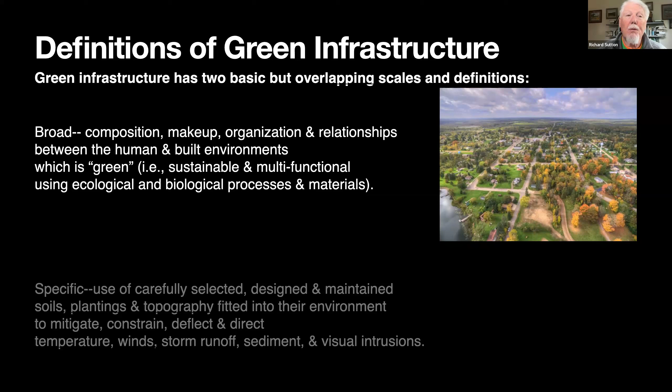So let's start with some definitions. Green infrastructure sounds like a mouthful, but there are kind of two basic definitions and they overlap at different scales. You have a broad scale that talks about composition, makeup, organization, and relationships between the human and the built environments, which is green. And by green, I don't mean the color green, but it's sustainable and multifunctional and uses biological processes and materials. So that gives us a broad overview of what green infrastructure deals with.

Specifically, though, on a smaller scale, say on a site scale or an individual project scale, the designer must carefully select and use materials such as soils, plantings, and topography, and fit that into the environment. Then the idea is to mitigate, constrain, deflect, or direct natural features or natural processes like temperature, winds, storm runoff, sediment, and visual intrusions—all those kinds of things that we see out there in cities and on sites.

So I'm just going to run through a laundry list of the types of green infrastructure that could be thought about. First of all, windbreaks and screens—those have a big impact, you can just tell by the name. A windbreak allows the wind to be deflected or slowed down, and screening is another thing, but it's more of a visual aspect to the use of plants.

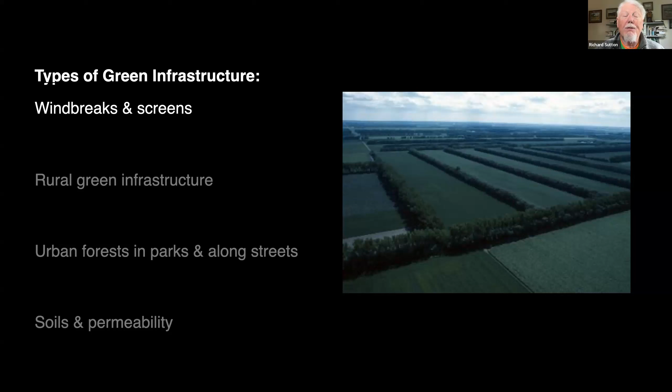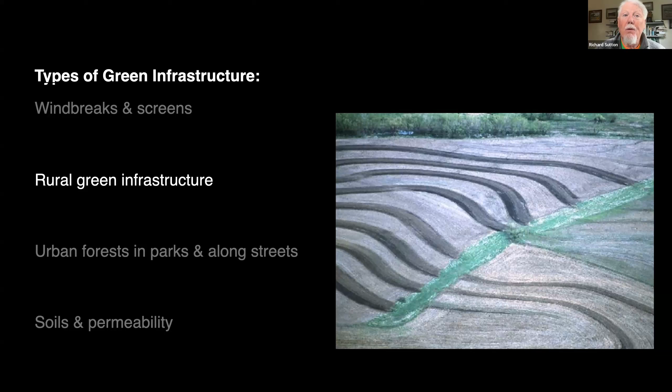We also see green infrastructure in our rural agricultural scene. Things like contours and grass waterways are simply a way of adding structure, again by manipulating the soil and the topography and the plantings to limit erosion. Our urban forests in our parks and along our streets have a big impact on not only the quality, but the quantity of temperature and runoff that we find in our communities.

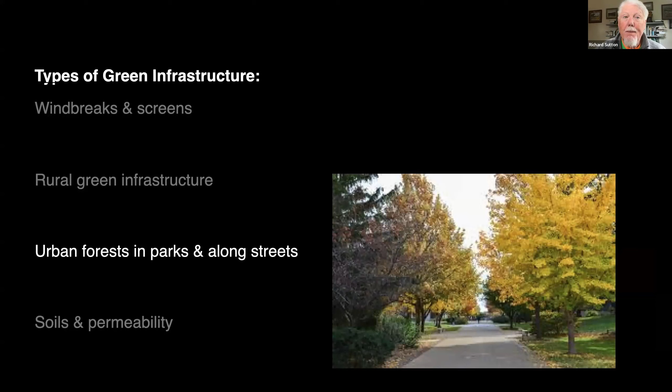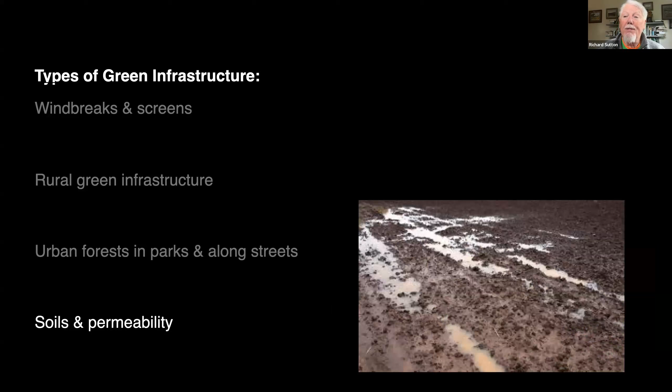Soil supports plant life, but it's also oftentimes the major feature that feeds into runoff. The stability of that soil is important, along with its permeability. Pavements over that soil change its permeability, so there are ways and techniques to use materials that allow water to soak in more easily.

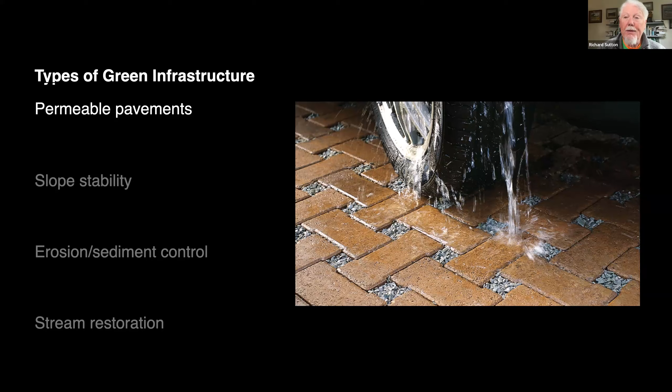Slopes oftentimes can move on us. Hopefully you don't get a landslide, but creep will occur, and there can be uses of redirecting water, but also uses of plant material to start to mitigate that problem.

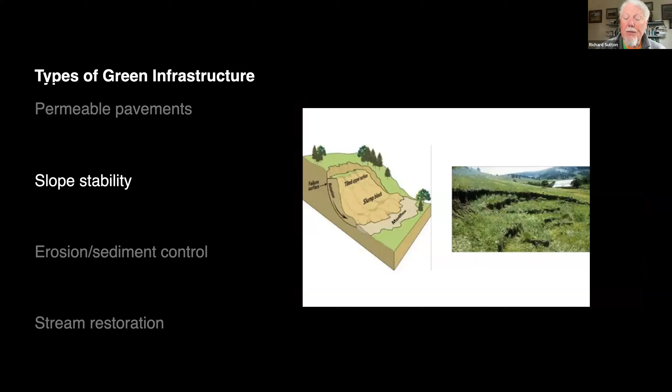If you have erosion, you're going to have sediment, and anytime you have exposed soil, it will be eroding either through wind or water or both. So it's important to be able to control the sediment that comes from erosion, and there are again a wide range of best management practices and designs that allow that to happen.

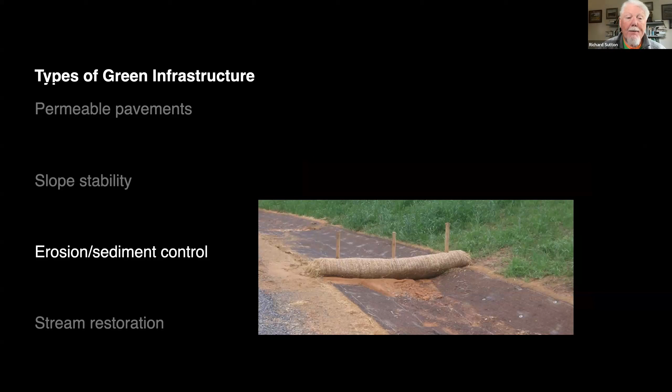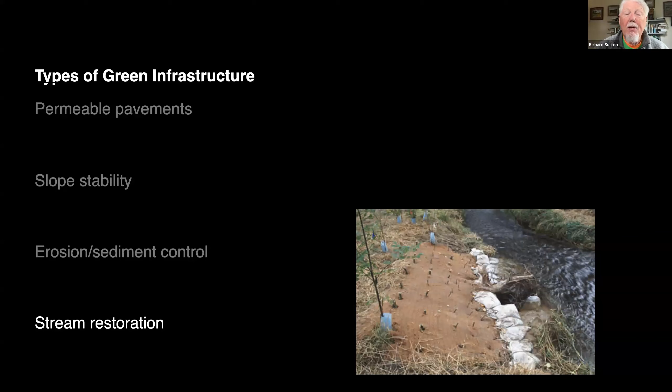Streams have a habit of changing course, meandering, and eroding banks, and that can be a real problem if there's nearby development that needs to be protected. One way to deal with that is to armor it with heavy concrete and stone. But a more green infrastructure approach would be to use plantings such as willows and other riparian vegetation to control the stream bank meanders.

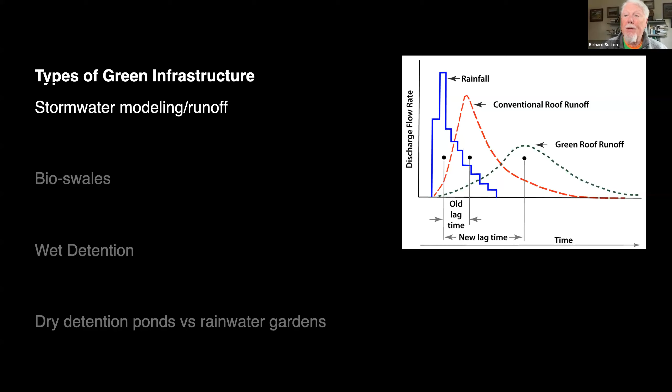Stormwater modeling and runoff—Steve's going to talk quite a bit about this, and I'm going to show this graphic again when I talk specifically about green roofs. This gets at the idea of trying to understand what happens to rainfall when it hits the surface. This diagram shows a conventional versus a green roof, and I'll explain this in more detail in a few slides.

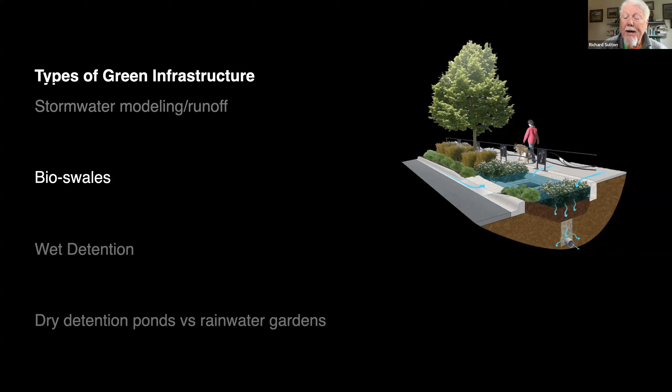Bioswales: instead of letting water run into just a concrete channel, you can add plantings that allow sediment to be taken out and also cleanse and add some biological activity to that runoff. Notice here, this is a good graphic to show multifunctional aspects. You're not only creating a bioswale, but also having an effect on a pedestrian walkway—give it an edge, add some greenery and pleasantness.

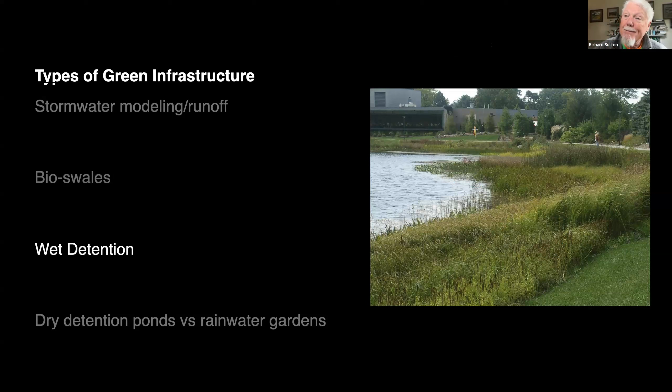Water can be detained, and there are real advantages to that because you get more biological processes occurring, although it does require a fair amount of area to hold water. More commonly, we may find dry detention, and on a smaller scale, rainwater gardens. Steve is going to go into some good examples of this a little later.

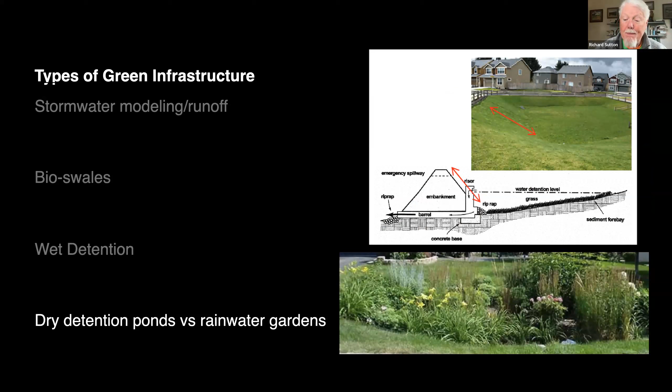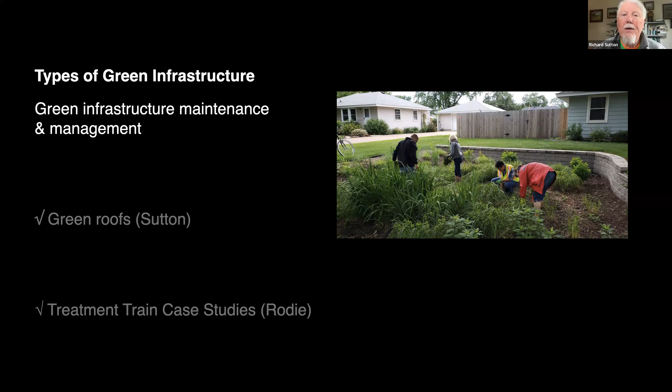As I mentioned, I'm going to talk about green roofs in a little more detail. And Steve is going to go on to talk about and give some case study examples of the treatment train of water in an urban setting.

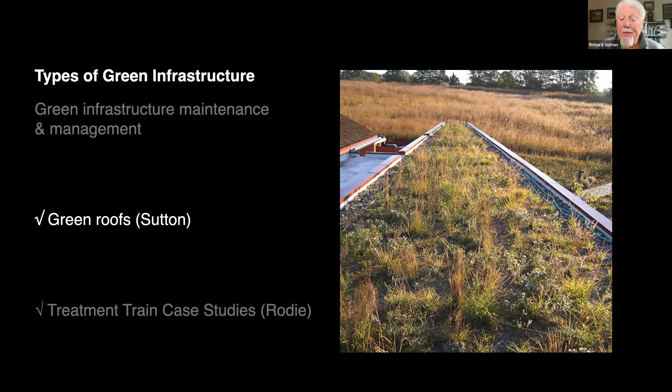Nebraska has a pretty long history with green roofs. If we think back to our soddies, they really had the ultimate green roof on them—cut up some prairie sod and put it on there. Unfortunately, they didn't have the membrane systems we have today, and those things often became kind of dank and drippy during extended rains.

Landscape architects have been using green roofs over structures for quite a while. Here are some developments from the 1950s where they used underground parking and covered it with green space, fountains, and trees. Set in an urban situation, this is much more pleasant than looking at just a paved parking lot with a bunch of cars on it. It also absorbs moisture and doesn't create as much runoff.

To really talk specifically and more recently about the history of green roofs, we need to go back to Germany. In the 1980s, Germany was starting to show some post-war urban decay. There was air pollution in the industrial valleys that was being turned into water pollution every time it rained, and that was a concern. They needed to deal with the runoff from these urban areas, so they had stormwater fees, but those became somewhat onerous and they needed to figure a way to reduce that cost.

They came up with policies that dealt with some of the existing membranes, and I'll give the Germans a tip of the hat—they pioneered the whole idea of membraned roofs, particularly on flat roofs like we see in this graphic. They simply used very shallow media to ballast or hold down the membranes, and vegetation spontaneously sprouted. So they thought, let's see if we can capitalize on this.

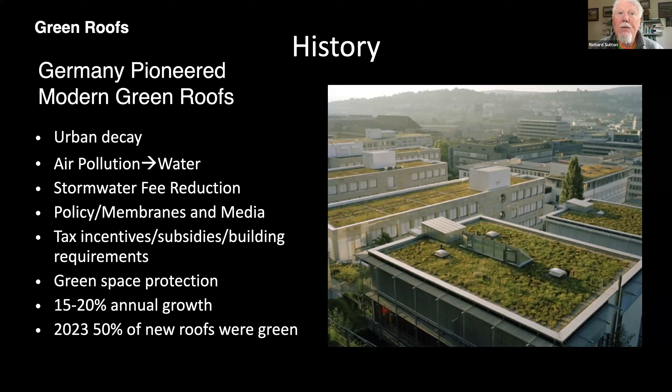They came up with tax incentives, subsidies, and building requirements to increase green roof use even more. From probably 1990 on up until today, you're looking at a 15 to 20% annual growth in green roofs in Germany, and by 2023, about 50% of new roofs in German urban areas were green roofs. So they're really making an effort to change how that hardscape, that building, interacts with their environment in urban settings.

Let me run through a laundry list of benefits here. Stormwater runoff is one of the major things, because a hard surface roof will allow water to run off much more quickly. It also changes the quality as well as the quantity of runoff when you put a green roof, or a layer of substrate and growing plants, to serve as a filter or a valve on that roof.

Once you get a green roof established and you have growing plants there, you've actually improved the biodiversity, because you can grow plants there that normally would not be found in a city area. Normally cities do not give large areas over to green space, and you can actually capture that on a roof.

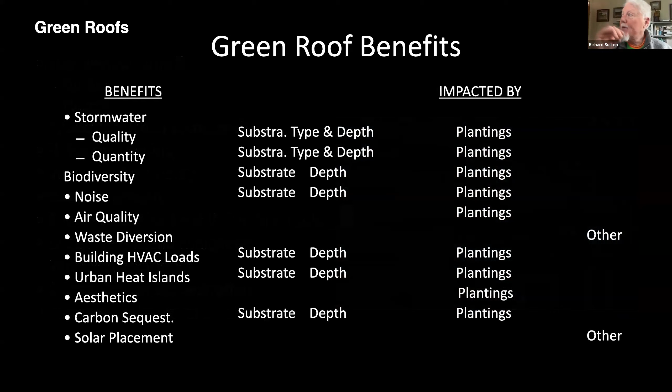So another little chart here pulls these things together — the benefits along the left side that I just detailed. If we talk about the two things that are critical to a green roof, the substrate, its type and its depth, married with the plantings, has an impact on all those things except perhaps waste diversion and solar placement. So when we talk about green roofs, we really have to deal with substrate and with the depth of it.

So here we are at the Pioneer Park green roof, soon after it had been installed, at the Pioneer Park Nature Center. I circled here this dark area where the runoff from the green roof has this murky, brownish color. This is a thing that green roof people don't like to talk about, but it's important, because that runoff is very high in carbon, phosphorus, and nitrogen.

And why would we want to leach those off of a green roof? We want to hold that on a green roof. Unfortunately, for the first few years, there's quite a bit of movement of that into the environment, and that's a problem.

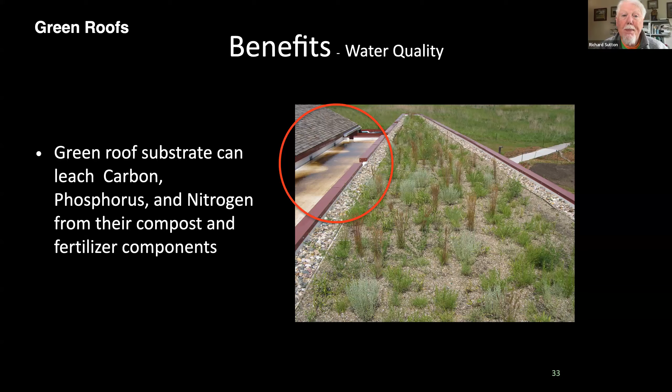A green roof is built with what we call a sandwich layer. There are different layers based on different systems that are used, but it has plants on top, growing in media that's over the top of, in this case, a board that holds water in small egg crate-like cups, that's again over a membrane that's over the insulation, then it's over the actual roofing structure. So that's a typical kind of sandwich, although it varies depending on the roof design.

When you hold moisture on the roof in those little egg carton type cells, that's great because it'll allow the plants to get water. But in the meantime, you're adding to the load on the roof, so that has to be compensated for by the structure. After 56 hours, that water really becomes considered part of the structural load that has to be accounted for by the design engineer.

Back to this hydrograph here where we show what happens on a green roof. Rainfall coming out of the sky - it's kind of a stair-step function because we're using collection buckets to measure it. It falls on a conventional roof, but there's a lag time between the time it first hits and when it starts to run off.

If we put a green roof on, notice how the lag time extends out. That's important because it holds the water back, and it doesn't all get to the local storm sewer at the same time, which tends to cause localized flooding. So you're not only cleaning the water, you're storing maybe a little bit of it in the media or in the egg carton-like cups, but you're cutting down the quick runoff for the roof.

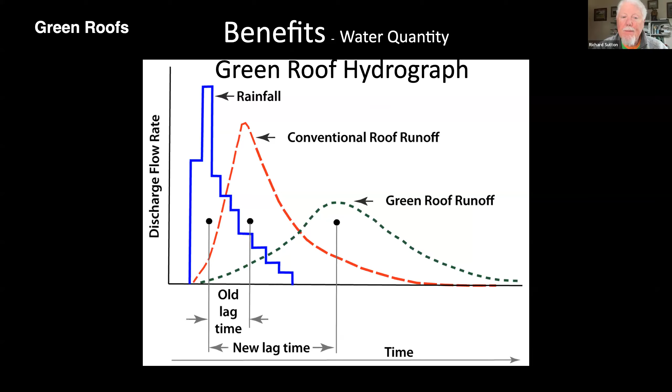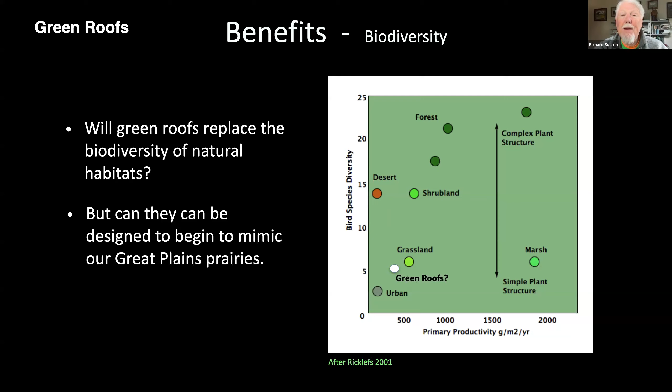What about biodiversity? I mentioned that earlier. Does that mean that green roofs are going to kind of replace our urban habitats or natural habitats in urban areas? Probably not. If we looked at primary productivity versus bird species, green roofs are somewhere just a little bit less than a grassland, but they can be designed to mimic our Great Plains prairies. So for a place like Nebraska, green roofs have some possibilities to allow some of our grassland birds to come and survive and thrive in town.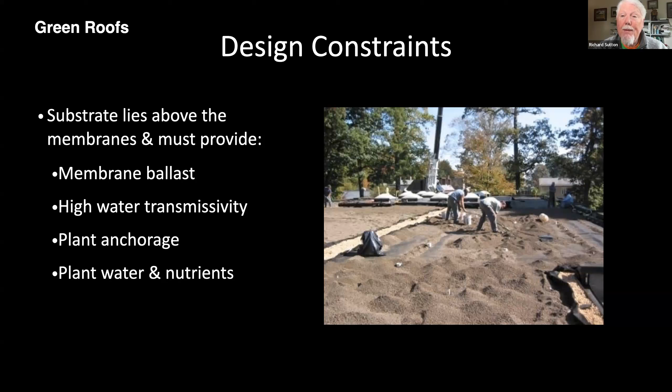Now, as I mentioned, substrate is an important component in green roofs. First of all, it ballasts or holds down the membrane. It has to have high transmissivity of water so that water moves through it quickly so that it runs off. It provides anchorage for plant roots, and it also provides plant water and nutrients. So it has a whole bunch of roles that it has to fulfill. You can't just design any green roof without spending some time thinking about the type of substrate and its depth.

In fact, substrate really defines a green roof type. We have an extensive green roof with 3 to 6 inches of substrate, which can only grow sedums and some bulbs and some very select grasses and forbs.

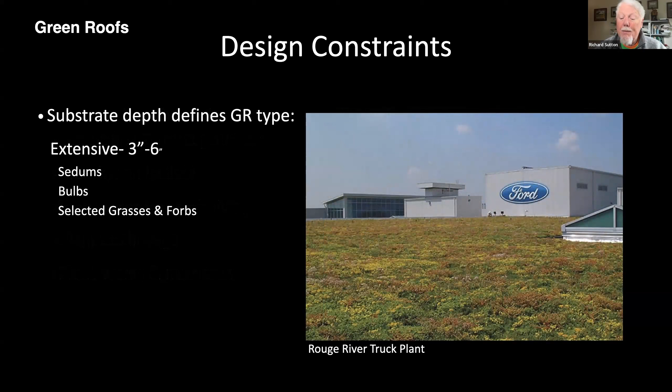Next, we have a semi-intensive green roof, which is maybe 6 to 10 inches. That means you can have those sedums and bulbs, but you can grow most of the forbs, and you can also grow some selected shrubs. So that gives us a little more plant diversity, and more plant diversity means more animal diversity.

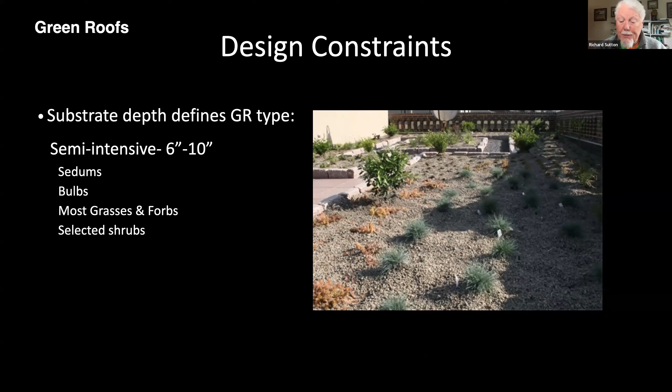And then finally, you have an intensive green roof, which really becomes the sky's the limit - you can grow trees, shrubs, what have you. It's really considered to be more of a rooftop garden. Trees here, by the way, still have to have structural considerations from the structural engineer.

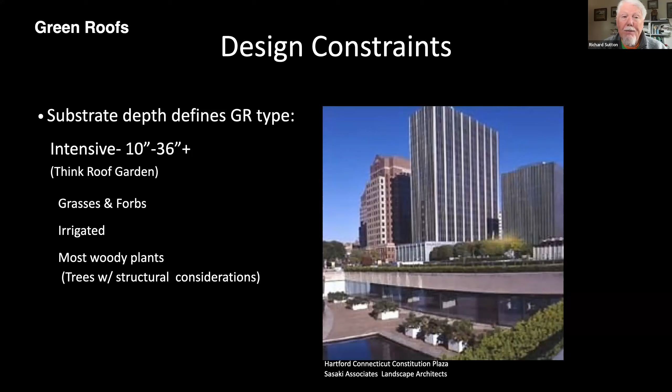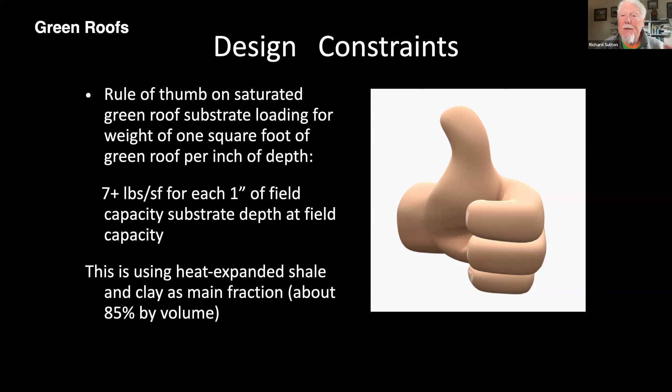So some design constraints that we run into when we're pulling the plants and the substrate together on the green roof: for about every 1 inch depth of saturated heat-expanded shale substrate plantings, you've got about 7 pounds. So if you get up to 4 inches, you've got 28 pounds there that you have to deal with on your structural loads. Now, heat expanded shale and clay makes up about 85% of the volume, air volume, on a green roof. It fills up with water and then drains slowly out, or roots pull it out.

Now, when you're designing a green roof, you always have to balance between the substrate depth and the cost. And the cost goes up as the substrate depth goes up. So we want to have deep substrate so we can grow more diverse plants, but the deeper it goes, the more it costs. So you're always caught between a rock and a hard place in that design.

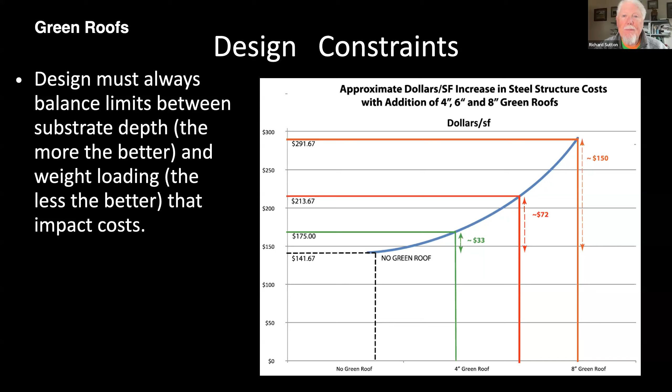Here's some older figures, but generally you're looking about half your costs of green roof are for substrate, maybe somewhere around 18% or so for the drainage layer. You also have some seeding, overhead and profit, like on any job, as well as some maintenance. You always have to balance these things out, but notice the cost—half of it is the substrate.

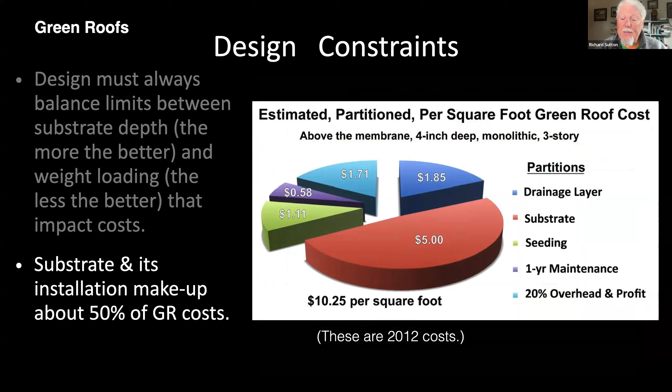So let me just share with you a little bit of my research work. I try to focus on reducing the carbon, phosphorus, and nitrogen runoff from new green roofs by incorporating biochar into the substrate. It's been known to suck up and hold onto those materials, still making them available for plant roots. I design more biodiverse green roofs by thinking of them as simple constructed prairies.

Increasing the depth of the green roof, again I'm caught between that rock and a hard spot, somewhere between extensive and semi-intensive. And if you're going to have a prairie ecosystem, then you need to cultivate a prairie aesthetic. These are not going to be nicely cleaned and maintained gardens—they're going to look more like a prairie.

I looked at reducing costs by pioneering green roof seeding with native grasses as opposed to planting individual plants, reducing roof loading weights by losing half their weight using recycled crumb rubber instead of heat-expanded shale and clay. It doesn't hold as much water, but you're still getting some interstices in between that hold water. And then reducing irrigation by increasing substrate depth.

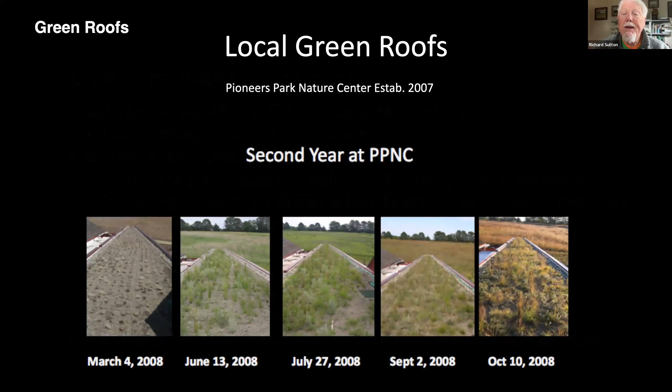Let me just quickly go through a couple of case studies here. Here was the Pioneers Park Nature Center, and in approximately one year we went from those plantings on the left to a fairly reasonable looking natural prairie-like setting on the right.

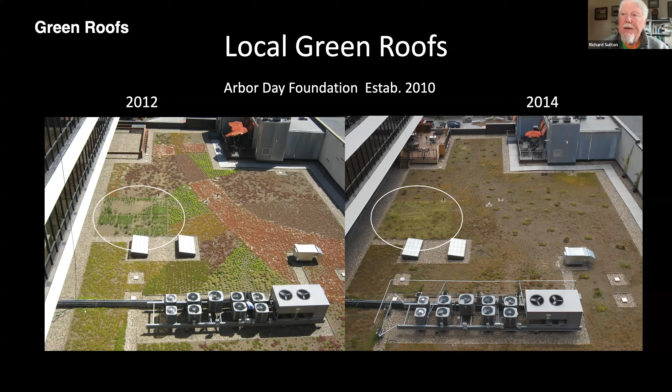Here's the Arbor Day Foundation green roof. That one was very tricky because it had a very thin profile, being over an existing roof. Notice how my little plantings of prairie plants, circled on the left, held up a little better than the sedum did—the sedum lost all of its fancy form that was put onto the roof. It just didn't make it.

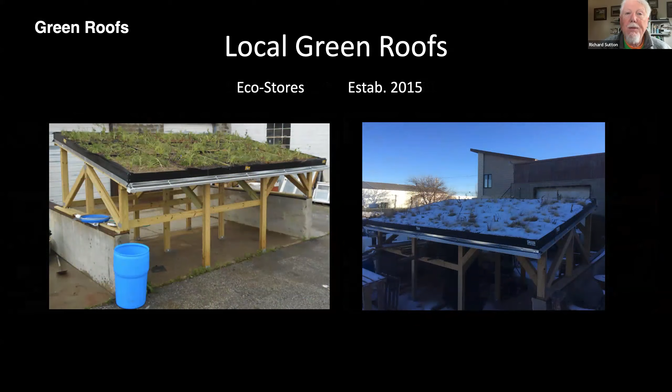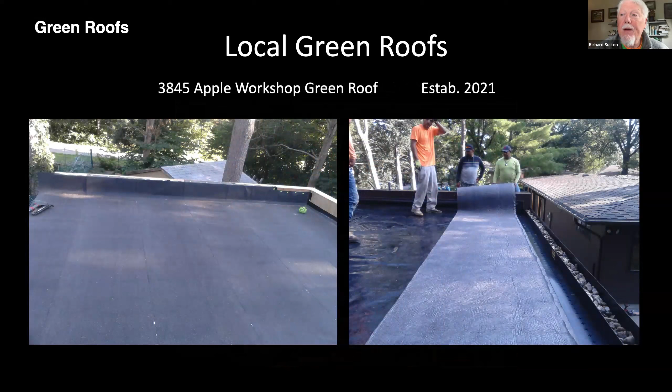And then, being someone who walks the walk as well as talks the talk, I used it on my own little workshop green roof and turned roofers into landscapers. This was 2021. It's completely closed in now, completely filled with native grasses and forbs.

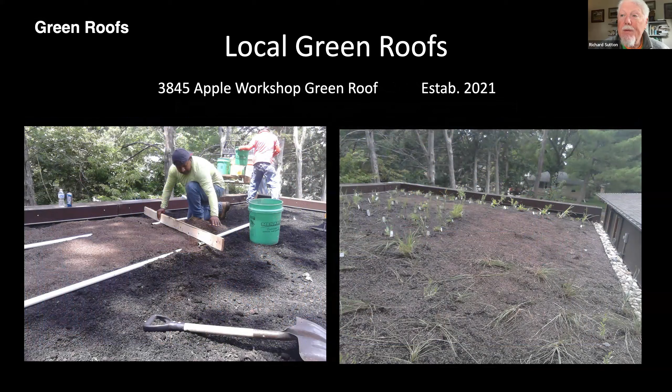So I'm going to turn it over to Steve at this point.

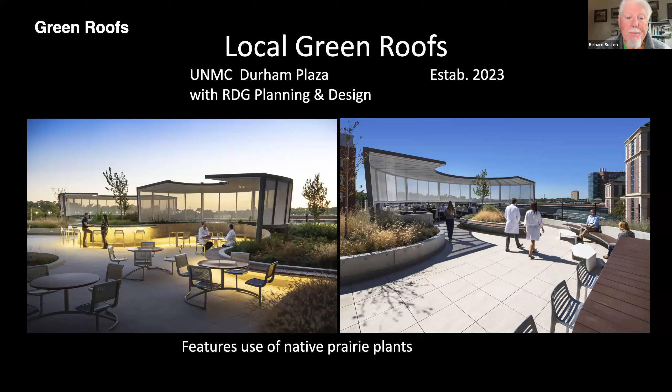Stop sharing. Nope, we can't hear you. Am I doing something I shouldn't be doing? Nope, I think you're fine. It's just Steve's microphone isn't working again, it looks like. Is Steve able to get on there?

Testing. Yes, now we can hear you. You can hear me and you can see my screen. All right, get rid of mine. All right, Richard, thanks for the little bit of the intro.

As Richard said, we both taught at UNO and UNL. We're both registered landscape architects with backgrounds in forestry and horticulture. It's been a great career relative to teaching, but also working hands-on with a lot of these projects that incorporate plant materials and design.

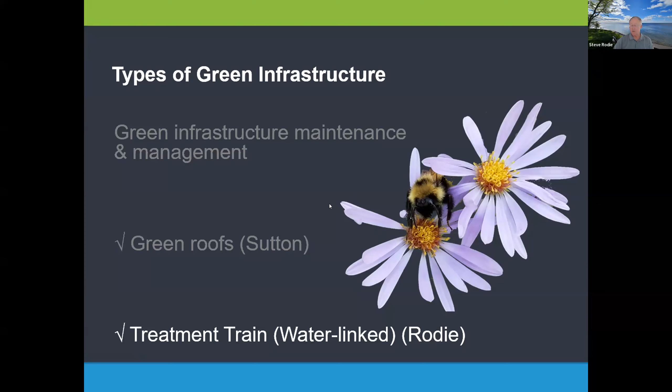So it's in South Omaha, and it's probably one of the best examples of a treatment train, one of the large CSO projects in Omaha done as a combination of multiple best management practices, showing what that actually looks like and works like.

So this is a general map of the project, and you can see a variety of different pieces here. The watershed basically goes from the top left down to the bottom right. There's an infiltration basin, and a constructed stream that ties those together.

There's a constructed wetland. Wetlands can be amazing for cleansing water, and the plants can uptake heavy metals. There's an infiltration basin and a bioretention garden.

The lake at Spring Lake Park is ultimately where the water ends up. It was literally designed to have really good fishing in it at this point, which was never the case earlier in the past when this was actually more of a dump.

And then you can see some of the dashed lines, so there are storm pipes here, and it does go on and ultimately ends up down at the treatment plant and/or into the Missouri River.

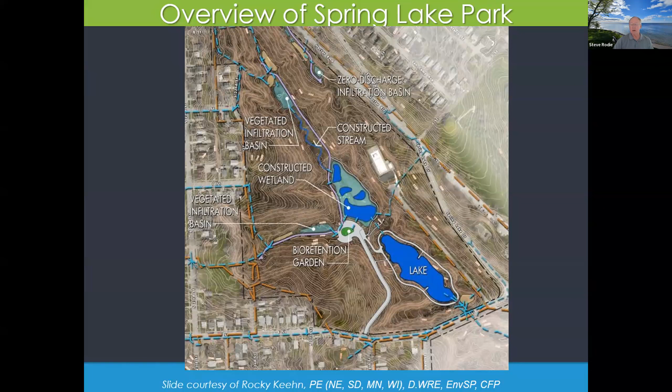But the context for this is that prior, all of this water basically ended up in our combined sewer system in pipes, and there was no potential to actually slow that water down and use it effectively, like we've talked about earlier in the presentation.

So this is a graphic that a colleague, Rocky Keehn, a professional engineer, came up with, and this shows what happens in the Spring Lake Park neighborhood.

The SAFL Baffle, that's the St. Anthony Falls Lab where they do research on water on the Mississippi River up in Minneapolis. The context for this is step by step, there are different features that hold onto the water. The SAFL Baffle initially takes erosion sediment out before it goes into a sewer. The meandering channel slows the water down so that it can infiltrate. And then you work down to the constructed wetland we've already mentioned.

Spring Lake Park also has a lot of benefit, obviously, both aesthetically, recreationally, as well as for water quality. Flat slope channels mean we don't get a lot of erosion. And then there was a splitting of storm pipes in terms of storm runoff and sanitary, so that was helpful.

But the context for this, again, as I think you can see from those earlier graphics, is that the more steps you have in the process of getting the water ultimately to the Missouri River, the better chance we have of holding onto it, doing some good with it, and minimizing whatever treatment we might have to do with it as part of putting cleaner water into the Missouri River.

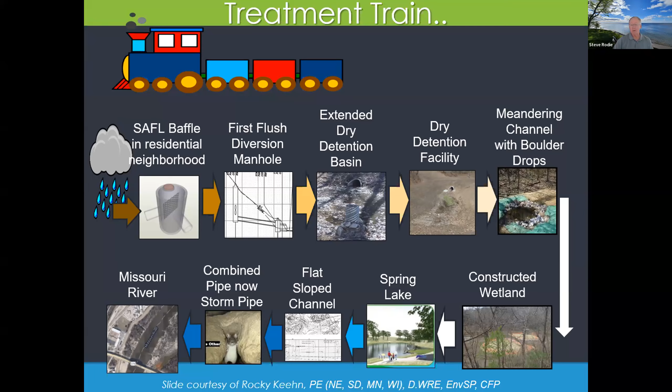So I have a couple of case studies here. They're different scales, but they're public, here in Omaha. Some of the guests may have already known of them or lived close by, but I think they're a good way to show how the treatment train works, but also different scales, different types of projects.

So this is the Dundee Elementary Green Infrastructure Outdoor Classroom. The context for this, as it says, was to address multiple issues with a beautiful and functional landscape. This is an overview of the school.

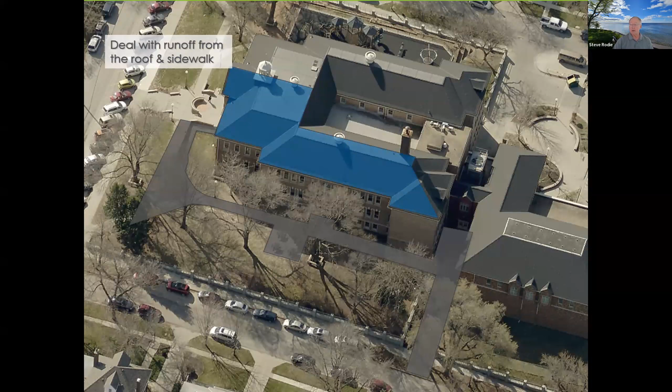So we're taking roof runoff from the north side of the building. There was the roof and the sidewalk both actually. There was a lot of erosion and water at the foundation of the building.

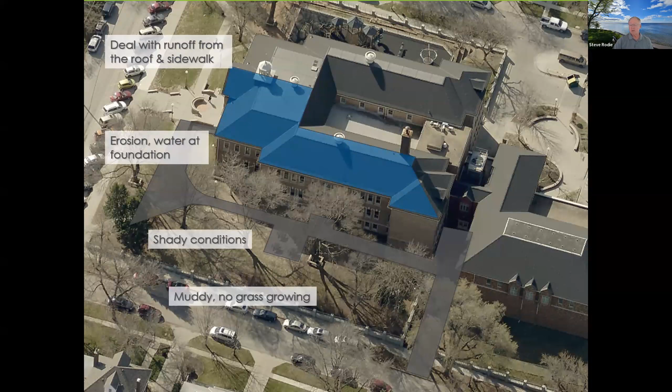This is the north side of the building, so it was shady to begin with, and then there were a lot of existing trees on site, so there's no grass growing. It was very muddy. It was a significant area that the school could use, but it wasn't that usable.

And being on the north side, there was a lot of ice buildup in the wintertime with the steps. And then this driveway constantly had ice on it as well, given it was flat going out to the street here.

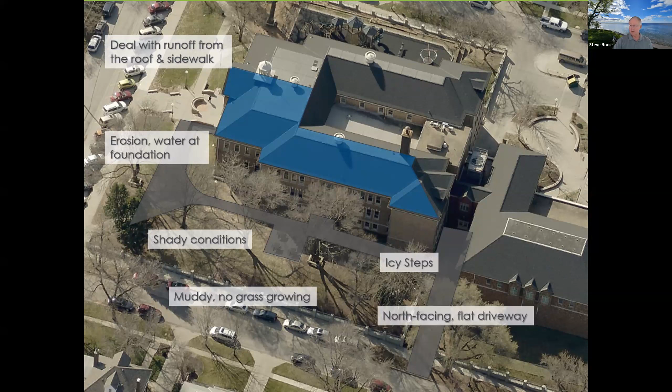A lot of problems, and the context again was to try to not only solve some of the environmental problems, but also create learning spaces, really try to take more advantage of this school area and put it into more educational use.

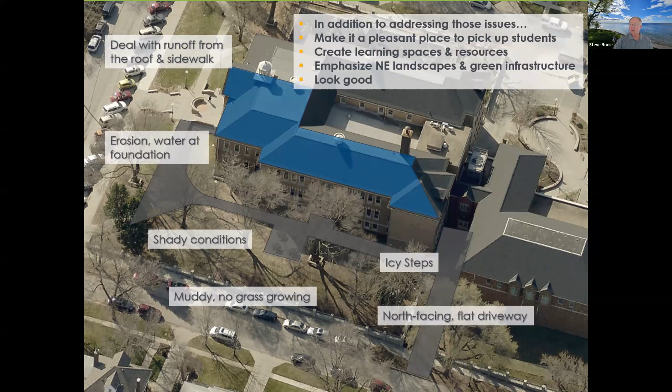And then again, have it look good, obviously, for the neighborhood. So this is the north side. Again, very open. There were some tables out there, but not well used, especially in talking to the school folks.

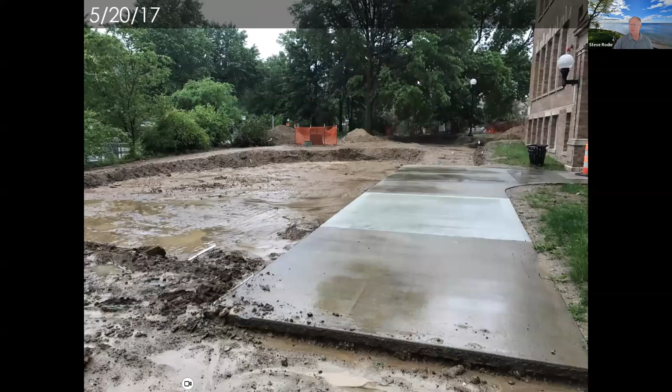This was the start of construction, and you'll see here in a minute as we go through all the different pieces that were put in. So this is a big patio of permeable pavers that will infiltrate water and gave a much better area

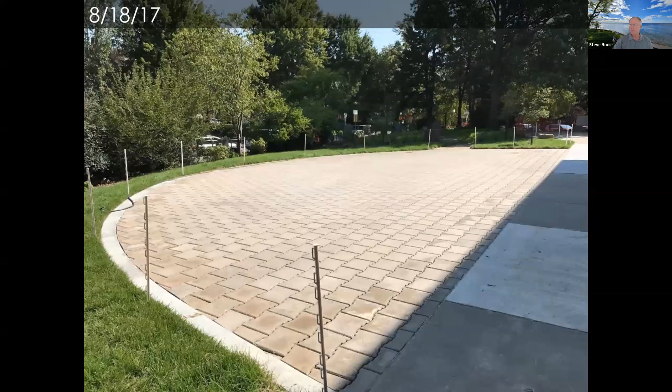to have students congregate and to be actually a useful area that wasn't going to be near as muddy. So here's what the pavers look like. There's spaces built in between the pavers so the water can infiltrate down through them. That water is then collected and routed back through a different direction. I'll show you in just a second on the map.

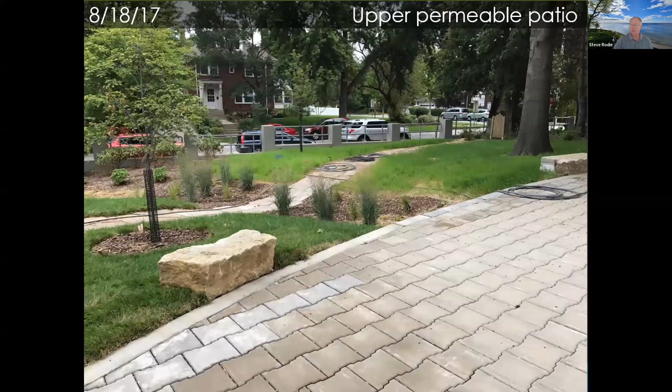So the whole context for this, again, is to treat water and manage water right where it hits the ground, and then collect it and make a real slow process of that water getting off the site versus what it used to do. So again, you can see here's a swale.

So the water is collected under the pavement. It goes across that sidewalk. And every opportunity is taken to slow it down and try to infiltrate it into what are fairly good soils in an older part of Omaha. This is about just north of Dodge on about 50th Street.

So a lot of that was taken out, and then the water would end up in the street or across the property, which was a lot better way to helpfully clean up that water.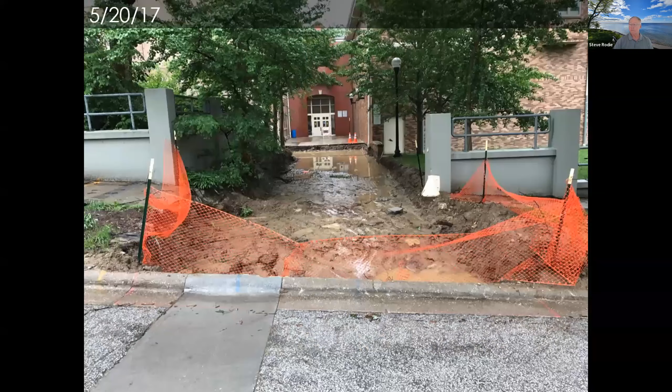So here's construction. There's more permeable pavement that was put in down here on this lower level, so again you wouldn't have the icing and the flooding throughout the year. So here's what that pavement looks like.

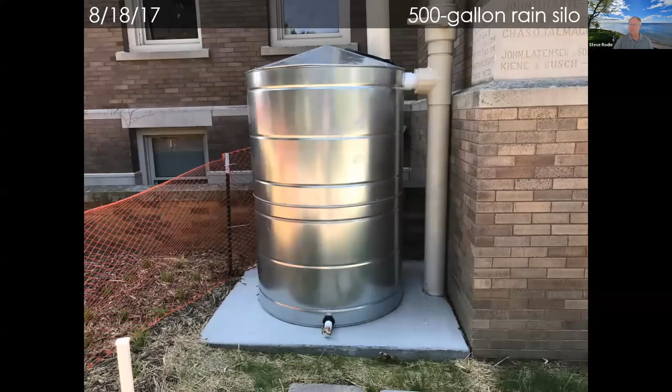We even had an additional cistern put in. So you can see, the roof runoff, instead of going straight into the old sewer pipes, now runs either into the water under the patio, which is collected, or it runs into the cistern. So we have a way to water plants out there.

So this is an overall diagram to kind of show that. We're looking north as to the top here, and I put the blue arrows in to show all the different routes that the water takes in terms of ultimately getting out to the street there on Chicago. So again, a much less direct route for all of the water.

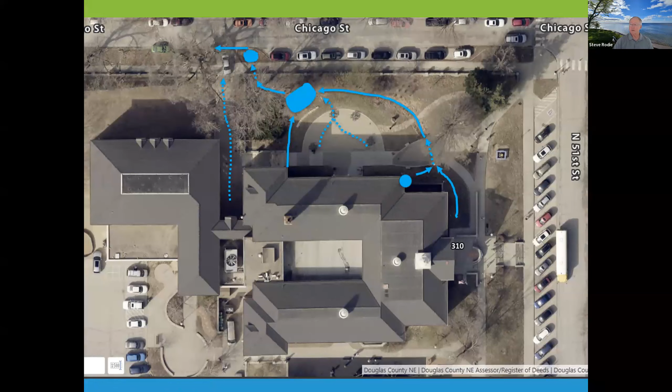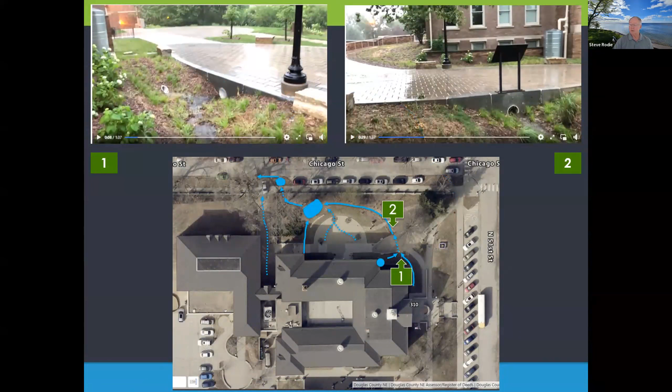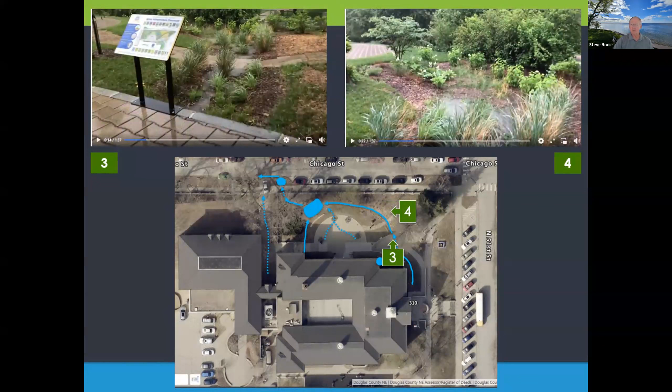So this is again picture one, picture two. We've seen some of these before, but I just highlight them on the base map to show where each of these occurs and which direction you're looking at, to be able to see what the management practice looks like. So 3 and 4, we've got a little bit of a rain garden with interpretive signage out there to help people understand just how complex this landscape really is and how much work it's doing with the rainfall to help clean the water and slow it down.

This gets down again to that area on the west. There's a couple of rain gardens out here that infiltrate the water. You should never have water in a rain garden more than about 24 to 48 hours. So we are detaining, we're definitely not retaining water in a rain garden. But there's always an overflow.

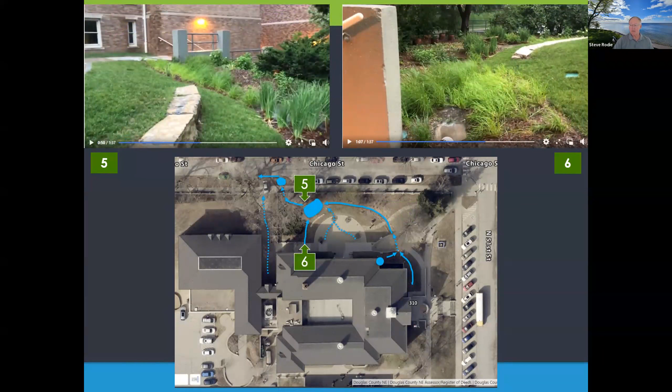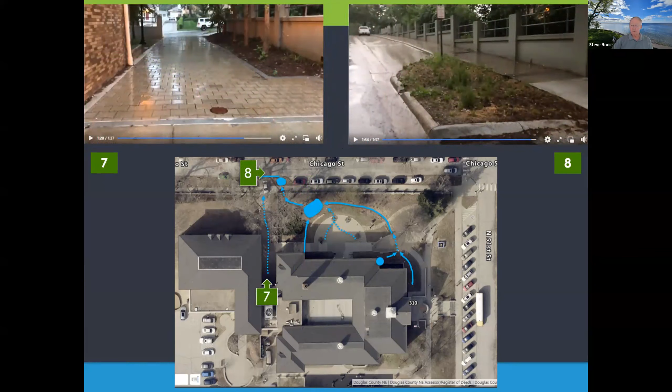So if it overflows, then it continues on the path, as you can see here with the blue arrows, and then ultimately water down at the bottom. That top right photo, number 8, shows a smaller rain garden right at the very end where the curb is. That curb cut is the ultimate endpoint where the water comes out into the street and joins the street runoff. So quite a journey for that water coming off the roof or the pavement to get through the site. All of that slowdown makes a huge difference in water collecting in the storm system and having to manage a much larger volume.

If that overflows, it actually goes into the Council Bluffs storm sewer. You can imagine in a floodplain city like Council Bluffs, with the Missouri River leveed, that the less water they have to deal with in a huge rain event going into their storm system, the better. So they were elated to have this and minimize all that runoff they would have had otherwise from the parking lots and the roof of the building into their storm system.

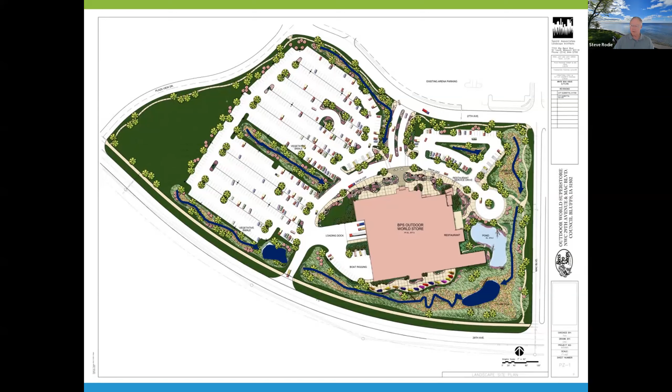In the meantime, all of these swales look very natural. The wetland at the lower right looks natural too. It's almost a great setting to have a Bass Pro Shop, I think it looks very natural. Perfect kind of a marketing framework for what that building looks like as you drive by on the interstate. So a lot of win-win on this project.

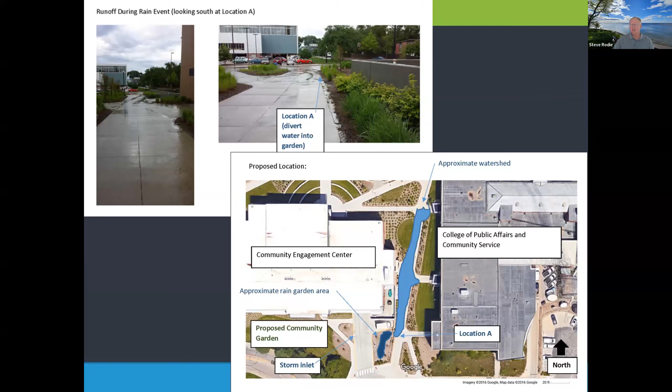If you look at the lower right picture, you can see the water that we could collect and potentially put in that approximate rain garden area. So was it necessary? Was it a safety issue? No, but it was an opportunity to put some green infrastructure into campus, put in some native plants, and take advantage of the fact that we had that runoff which otherwise was just going into the storm sewer.

When you design these landscapes, you have to think year round. There's a lot of stuff that gets cut down first in the spring, but the notion of winter color and texture—the bald cypress are deciduous even though they're conifers, so they have a nice rust red, rust orange fall color. But the context of this is that it's twelve months a year. It can be a challenge to design these gardens with a lot of perennials and forbs and grasses and have them look good a big part of the year. But that's part of the challenge, it's part of the fun of designing these.

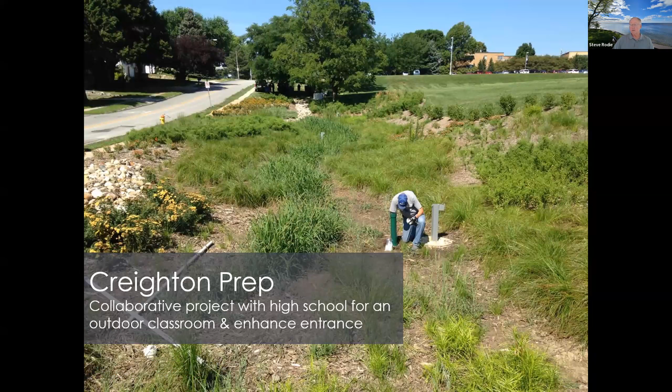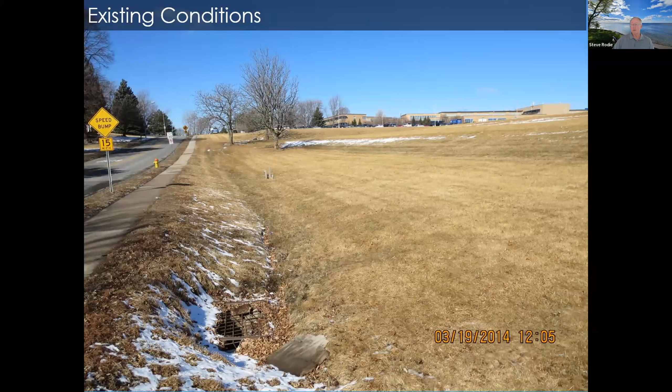So just a couple—that's kind of an overview. I guess I would say one more thing in terms of defining green infrastructure: our profession is taught to try not to mess it up in the first place. Nature has an amazing ability to manage stormwater—it always has. Having a large tree canopy is a stormwater maintenance and management tool. Good soil manages runoff. So part of the challenge, I think, oftentimes with development is to save what's good, and not think that if we're going to put in something brand new, somehow we've figured it out better than nature would in terms of how nature would manage it.

So if we do need to replace, if we can emulate nature—as Richard talked about with the prairie plants on a rooftop versus sedums—then there's a lot more multiple benefit that we can derive from some of these projects.